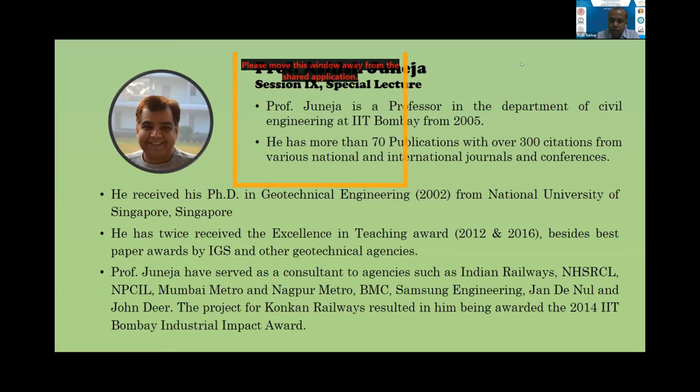Professor Juneja has served as a consultant to agencies such as Indian Railways, NHSRCL, NPCIL, Mumbai Metro and Nagpur Metro, BMC, Samsung Engineering, and Jan De Nul. The project for Konkan Railways resulted in him being awarded the 2014 IIT Bombay Industrial Impact Award. With this, I'd like to hand over the session to Professor Juneja for his special lecture on disturbance in soil structure due to post-cyclic recompression. Thank you, sir. Over to you, sir.

Thank you, Professor Sarkar. It is indeed an honor to be invited to this prestigious conference. To be honest, it seems the way it has been planned and the way the background images appear, as if we are in the conference venue. If you zoom in, you can actually see the first row seat of the conference hall.

With this, I'd like to spend the next 15 to 20 minutes to tell you what we have recently done in our laboratory, examining what really happens to soil after it is subjected to numerous cycles of loading. The genesis of this comes from the figure on the right-hand side, which shows a railway embankment.

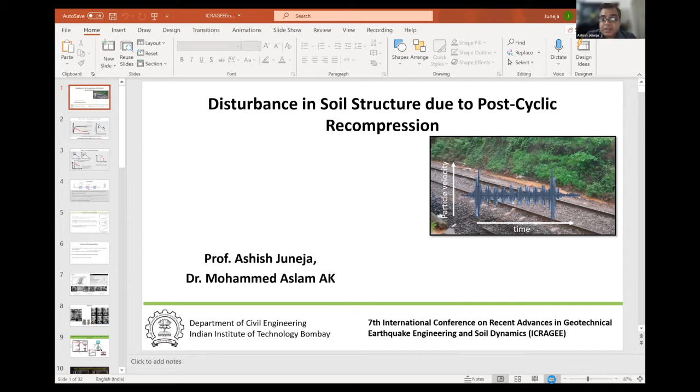So we are looking at what soils, the improvement, and at least to quantify those numbers. This is work by Dr. Mohammed Aslam during his PhD. He's now very well established, and I'm grateful. All these slides which are present are in fact from his PhD work.

So to give you a brief background, what really we mean by when the soils are subjected and what happens. If you look at an ordinary triaxial test, the figure on the left-hand side shows the same sample, the same soil with the same void ratio, but one is subjected to a higher confining stress, the other one is subjected to lower confining stress.

Lower confining stress, common sense tells us it'll show us a hump and a drop. A higher confining stress will be more like, irrespective of whether it's clay or sand, it'll show you like a normally consolidated soil. So to understand these two figures, look at the compression space on your right hand side. Both A and B have similar void ratio, but because they lie on either side of the ultimate line or the critical state line, you see that soil A will compress and soil B will dilate.

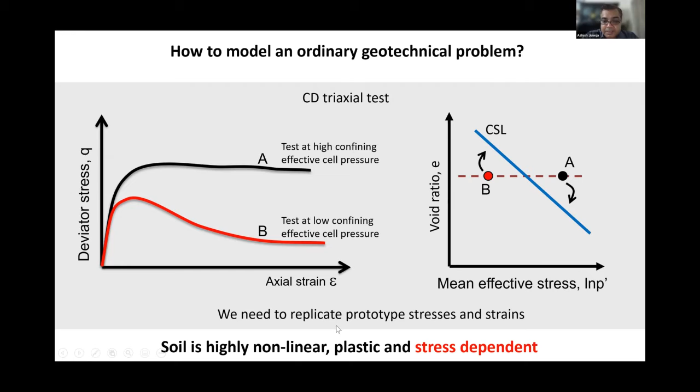It's important to understand that the soil from these curves is not only nonlinear, plastic, but is also stress dependent. This stress dependency is something which we'd like to examine in the next 10-15 minutes.

Now if you look at an ordinary Mohr-Coulomb or even those Cam Clay kind of models, what you see is this E log P curve, your standard E log P curve. What you see is if I'm on the URL, unloading-reloading line, can I just make this mouse thing as a...

Just trying to make this as a pointer. Okay, right click, yeah.

So if you look at the unloading reloading line, both Mohr-Coulomb or those Cam Clay family of models, they'll tell you no matter you go millions of times on this line, you'll just retrace this path every time. So the same thing happens when you do multiple loading, unloading. It's just a replicate of that figure.

The same, and if you look at the stress space, starting from A, going up to B, and if I unload B and then reload it, like any kind of dynamic load I apply, it just goes up and down with no change in any additional strains occurring, and no new development of shear volumetric strains being developed.

However, what you see is if I have multiple load cycles which are going at a certain period of time, the pore pressure development in the first cycle, and then in the second cycle and third cycle, it's not the same each time. You do see a different response which is more like a real life scenario.

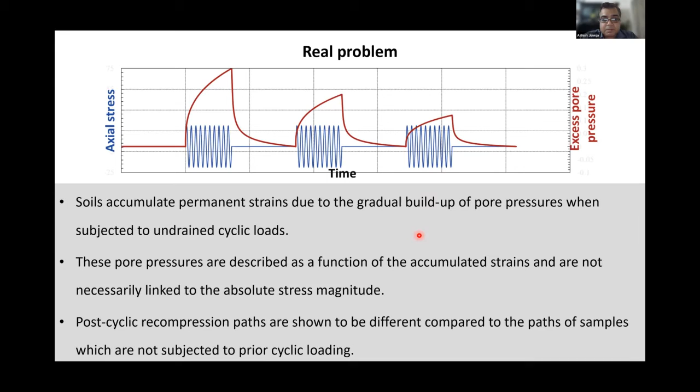So the bottom line is you do need something like a slightly more sophisticated soil model to understand this phenomenon which occurs.

And I'd like to just give a brief background on what happens to soil during loading. During loading, majority of you would be knowing you can either have a flow type failure, meaning loose sand or normally consolidated soil. They're quite nice up to a certain number of cycles, and then bang, it fails. Dense deposits will have more like cyclic mobility, wherein the deformation increases, and this first and second case are more serious.

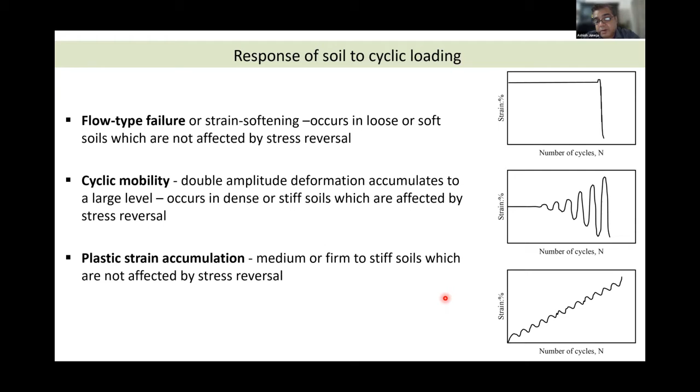The third one is where the soil is still trying to accumulate a lot of plastic strains, and it does not really reach its ultimate state. It just continues to take in more load. We'll concentrate more on the first and second type, because these are the soils which are really studied for liquefaction studies. We also look at the third one, because these are the ones which actually interest us for long-term stability of embankments, which is the case here.

In the next 15 minutes, I'm going to present the stress pore pressure changes in soil when subjected to cyclic loads, and a degradation model similar to structured soil models. It's a simple model—there are more complex ones, but because of limited available data, many recent models are hard to comprehend due to the number of input parameters. I'll also discuss what happens in post-drainage, whether intermittent or post, and briefly comment on observed changes in soil structure.

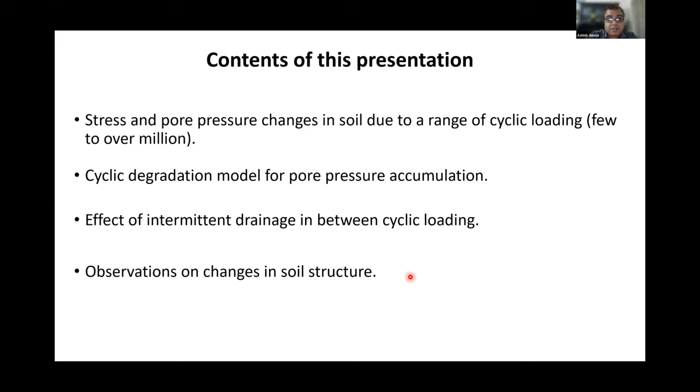Routine lab tests were done—this is pretty standard. One additional thing I'd like to highlight is the sample preparation method. Sands are normally prepared by pluviation, our preferred method, so I'd like to speak about that. For silty deposits, we used the under-compaction method, which is routinely followed. But let's look at the pluviator we have in our laboratory, which we tried to model using DEM.

That's a simple single soil particle. If you look at it, at 1 second it's somewhere here, then it falls down and rebounds. But look at the graph on the left—at 1 second, it's still there, not moving. At 1.5 seconds, marked by the vertical line, it starts to drop.

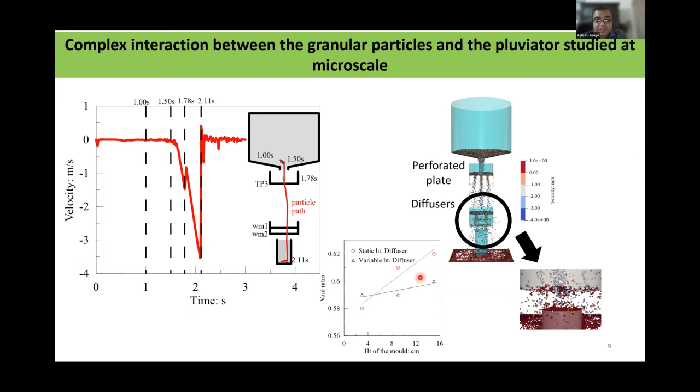This is what we normally advise: the diffuser should be able to move up as particles fill the container. Obviously you want a constant height of fall, but fixing the first perforated plate helps break up larger particles—not lumps, since this is granular material, but it prevents the soil from falling in a lumpy manner. The other method, which is more static, shows a difference in void ratio. These values help explain why the soil behaves in a certain way.

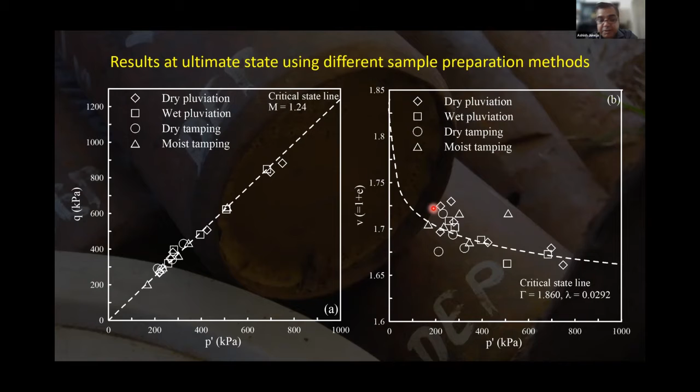But having said that, the ultimate state—meaning the friction angle at its ultimate state, shown in the first figure—and the figure on the right, showing other critical state parameters from compression space, meaning constant volume failure or failure at ultimate state, those conditions do not change regardless of the sample preparation method used. However, for dynamic loading, there is a substantial difference.

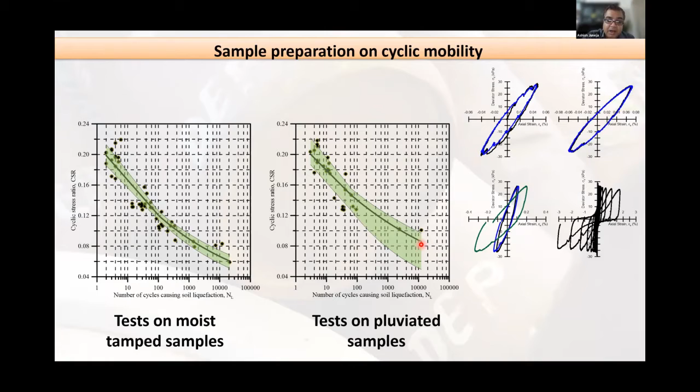If you compare the figures on the left and right, the moist sample, if you take a hand lens and look at them carefully, gives a lower number of cycles to reach liquefaction compared to the pluviated samples. Pluviated samples are notably higher. So we always say pluviated samples replicate more of a natural kind of deposit.

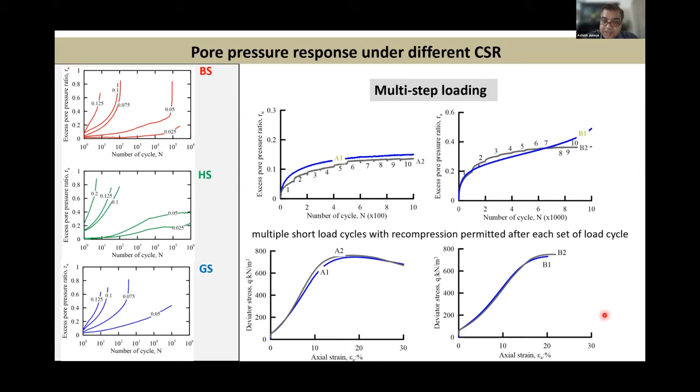But what we see is the triaxial test results, irrespective of whether we went stepwise or in one single go of maybe 10,000 cycles or more, suggest that the stress-strain response is quite similar. So this led us to the very basic degradation parameter, the development.

This is more than 30 years old, I think Ni et al. used it probably a couple of decades back. That's a degradation parameter similar to one used for structured clay. What we see is if I introduce this, can I develop or use this degradation parameter in terms of xi times N, so that's xi.

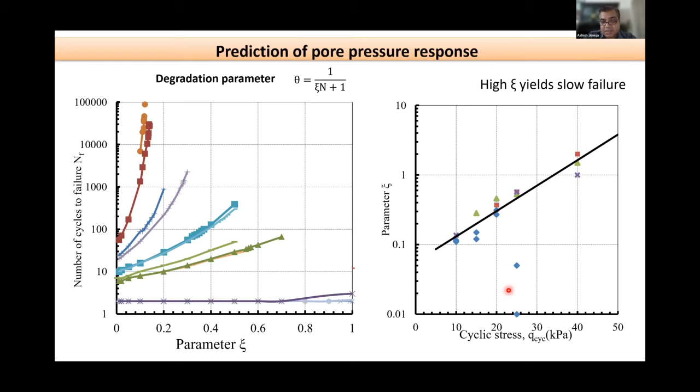So you can develop some relationship, and let's see with this relationship whether we're able to curve fit it, which is what engineers are happy with. What you see is with a very large number of cycles, maybe about 100,000 or so, you cannot get a fit, there is a large difference. Although with fewer cycles, up to 100, it gets a really good fit. Obviously, because you're trying to connect the two ends of the curve, not the whole curve.

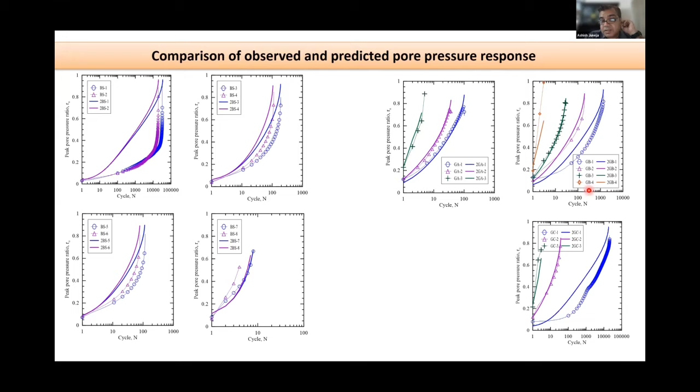But for the majority of tests where the number of cycles is large, it's difficult to connect, so even here this degradation parameter is not helpful. There are other models, like the power model, which require curve fit parameters A and B. The idea is you trace how the excess pore pressure ratio develops against N.

But again this has limitations because you're still not able to connect. There are also hyperbolic models with two unknowns, and with the development of more curve fitting platforms, as a student you can sit down and get endless fits, but none of them give any theoretical background to what really happens. So in the last couple of decades, a lot of papers have come out without theoretical background, though they come at much less computational cost and are simple.

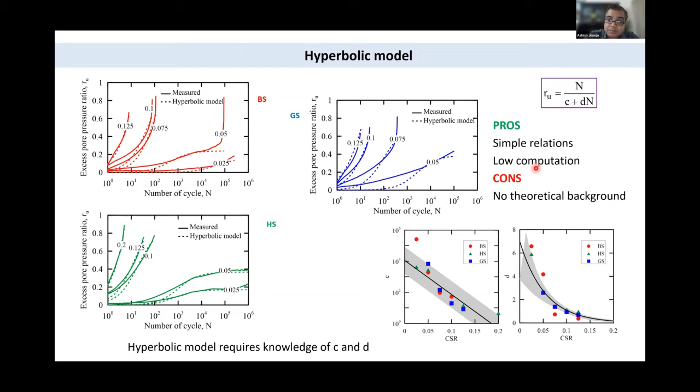What we would like to see is something where the soil performance can tell us more, not only the pore pressure response, but also whether the strains and stresses are able to tell us something more about the performance of the soil.

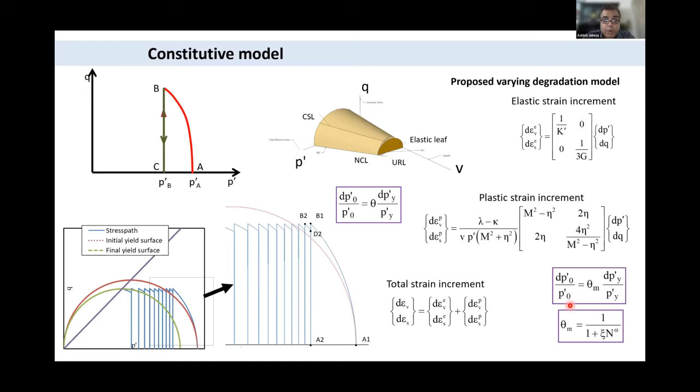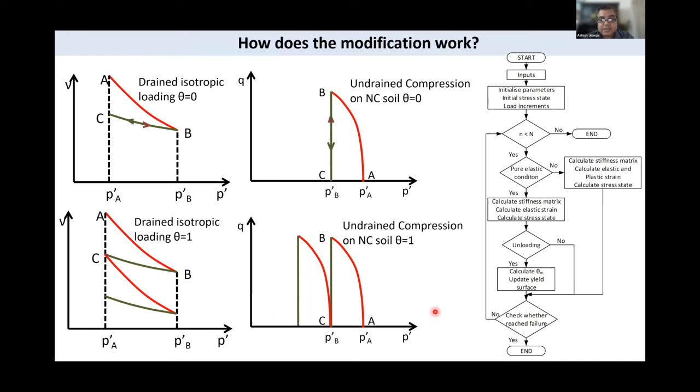Okay, thank you. So this degradation parameter, as we said, varies from 0 to 1. 0 would mean your typical Mohr Coulomb or Cam Clay, and 1 would mean your hardening parameter is made to change. So I'll just skip through some of the additional slides.

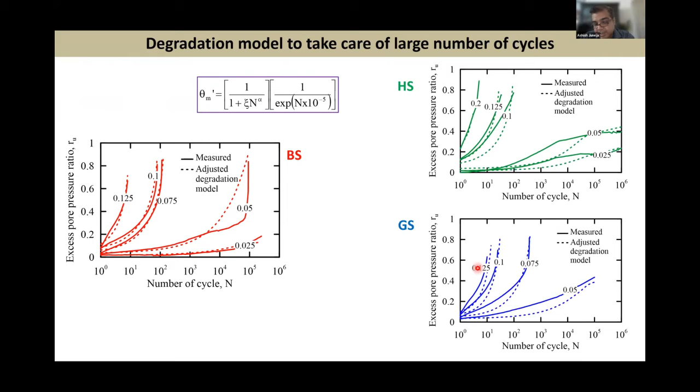Let me go to the next one, directly to the final one. So the final one is with the adjustment against the hardening parameter, we are able to model the response of the soil with only two additional unknowns. This is the beauty of this simple model.

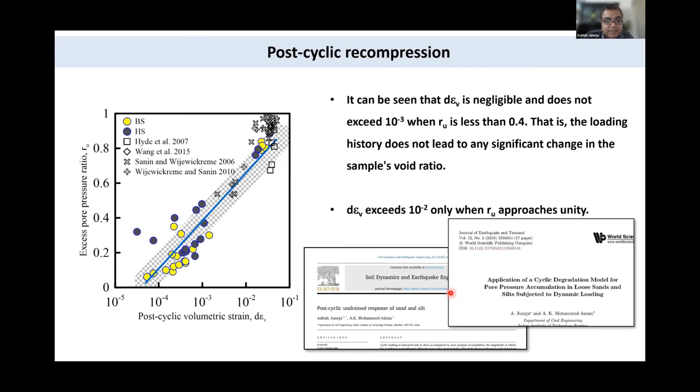This is probably the last thing I'd like to highlight: with samples having Ru less than 0.75—you can take it as a magic number—the unloading reloading line, shown by black arrows, doesn't make much of a difference. The property of the URL, or the kappa as we say, is the same. But with Ru more than 0.75, there is a change in the slope of the unloading reloading line, meaning the structure of the soil is changed when your pore pressure response is high.

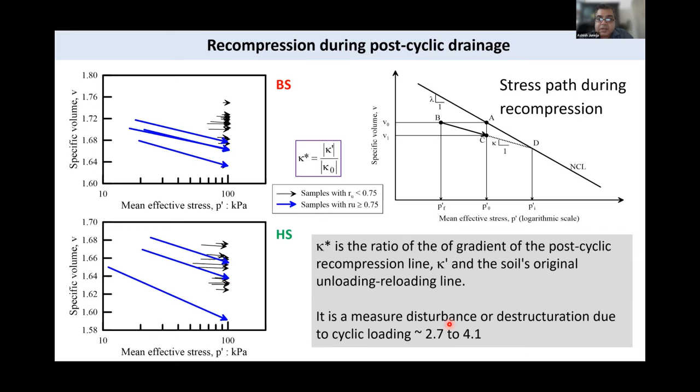In fact, these numbers can vary anything from 2 to 4, so your gradient of the unloading reloading line is large.

So again with this background, can we now predict what is the increase in strength? Q star is your new strength divided by old strength, that's undrained deviatoric strength increase divided by the old one, and that's your OCR by definition. If you look at the paper, the definition of OCR is defined there, how we have taken it. But with Ru less than 0.75, you still see that the performance of the silty or angular sample is better compared to the rounded granular deposits.

If I have RU more than 0.75, that is when the pore pressure response is higher. What we see is the increase in strength seems to be independent of your CSR.

That's again an interesting thing, but it has a relationship between OCR over here and the power, which we have as OCR to the power of some capital lambda.

This capital lambda, our work has shown, can be obtained even from your standard triaxial test. Meaning, if I need to find the increase in strength of the soil due to dynamic loading, I really do not need any cyclic triaxial test. I do my routine drained and undrained triaxial testing, get my capital lambda from there, and I can predict what is my increase in strength.

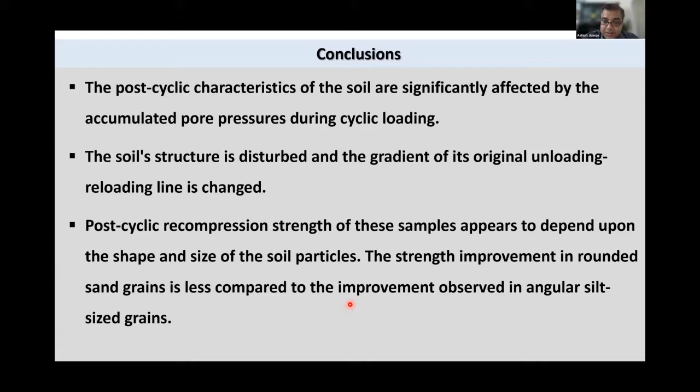With this, I'll conclude the presentation. The post-cyclic characteristics of the soil are dependent on the pore pressure accumulation function, which is based on numerous work. You can work over it. And of course, we have given some hint on the particle size and shape, which makes some effect on the performance and response.

Okay, with this, I'm sorry I took an additional 5 minutes. I'm really grateful to the chairman and vice chairman for allowing me to speak.

Thank you, Dr. Juneja, it was a very interesting presentation. That is what prompted me to give you as much time to speak. I wish we had the opportunity of listening to you some more, but I think there will be in the future. Thank you very much for your very vivid presentation.

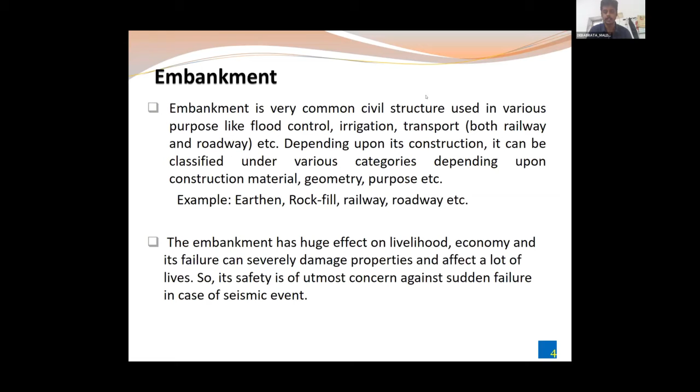Introduction. Embankment is a very common civil structure used for different purposes like flood control, transport, irrigation, and depending upon its construction material or its purpose, it can be categorized under earthen embankment, rock fill embankment, railway or roadway embankment. It has huge effect on livelihood, and its sudden failure in case of a seismic event can cause a lot of damage to the property as well as human lives.

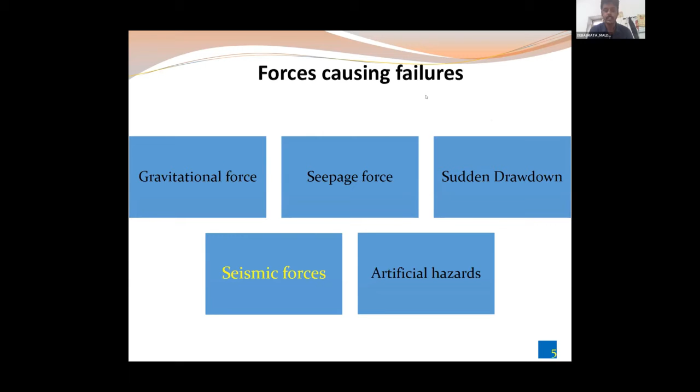Low height embankment normally in our country is constructed for rural or suburban transportation purpose, and it is normally checked against static stability, but very few times, due to low budget or other constraints, it has been checked against dynamic loading. But in recent times it has been shown that due to low to moderate level earthquake, this can be a cause of failure of those embankments.

So a thorough analysis of this type of embankment with foundation soil in static and dynamic condition, in association with monitoring of different parameters like pore pressure, vertical deformation, and lateral deformation, is very necessary.

And for dynamic loading, a representative low to moderate earthquake has been taken, but as it has quite high PGA...

Yeah, tell me, you continue. Arya, can you please mute the other participant, please?

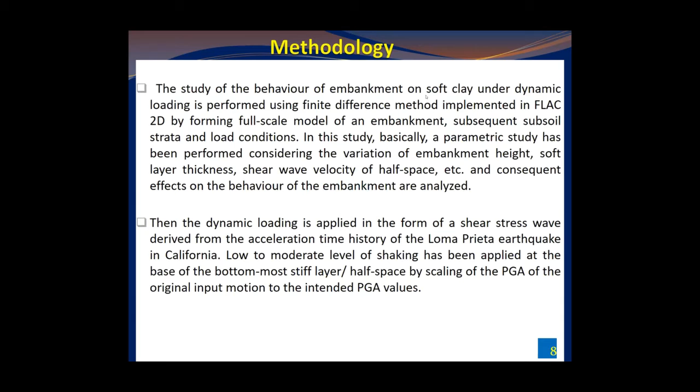The low to moderate earthquake had quite high PGA, so it has been scaled down with respect to PGA to simulate some input motion to intended PGA values. Now this is the geometry of the embankment.

The face width has been 10 meters with a quite stable static slope, 1 vertical is to 2 horizontal, and soft layer thickness has been varied between 5 meters and 10 meters, and below the soft layer there is a stiff clay layer. Its shear velocity and shear modulus has been changed, and all combinations lead to 12 different models.

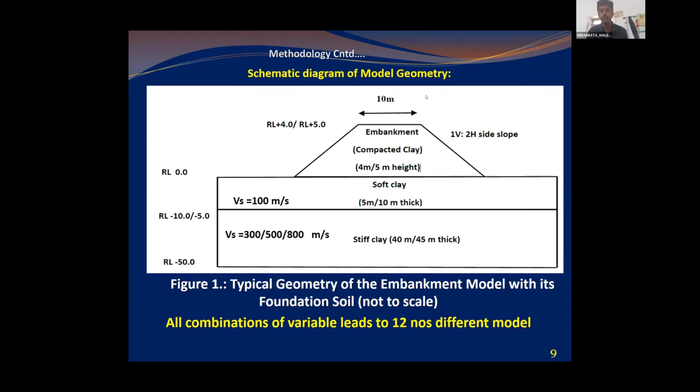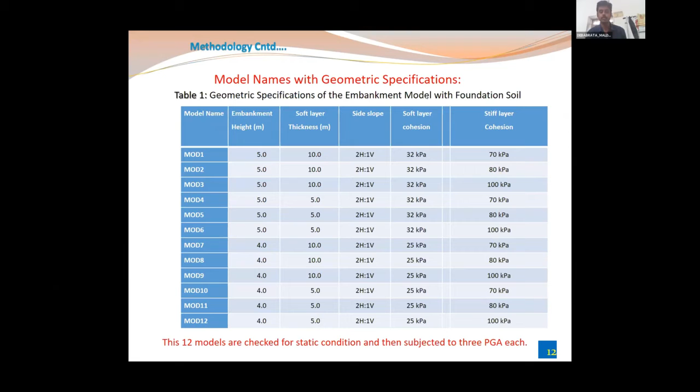In Table 1, the geometric properties of the 12 models have been shown, and in Table 2, the engineering properties of the soil material have been tabulated.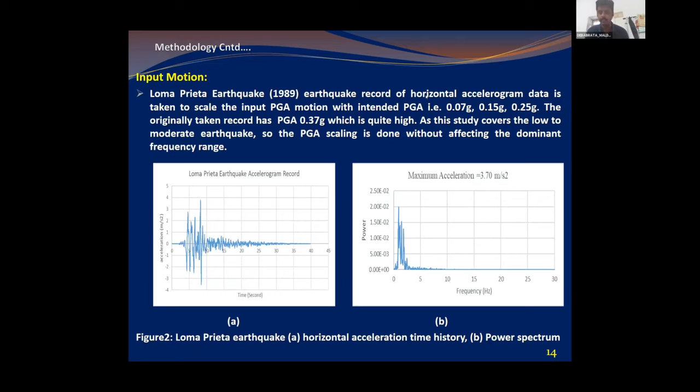Now this is the representative low to moderate earthquake that has been taken as reference, and these are the power spectrums showing the significant frequencies mostly within 20 Hz. And these are the original acceleration time histories derived from the original earthquake with PGA 0.07, 0.15, and 0.25 G that has been used in the dynamic analysis of the model.

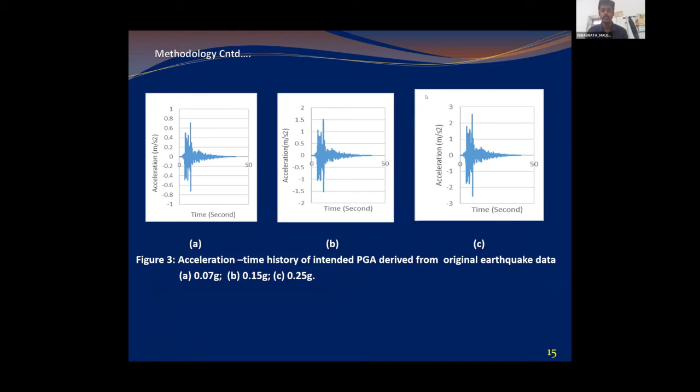The shear stress time history has been applied at the base of the model for analysis, and the boundary has been taken as a non-reflecting boundary. This means the wave reflected back to the model won't affect the result, as the wave would not be reflected back into the model.

For mesh generation, the mesh size has been kept in association with the study of Kuhlemeyer and Lysmer, at 1/10th of the shortest wavelength associated with the significant maximum frequency range. In our case it turned out that the maximum rectangular element is of size 0.5 meter by 0.5 meter.

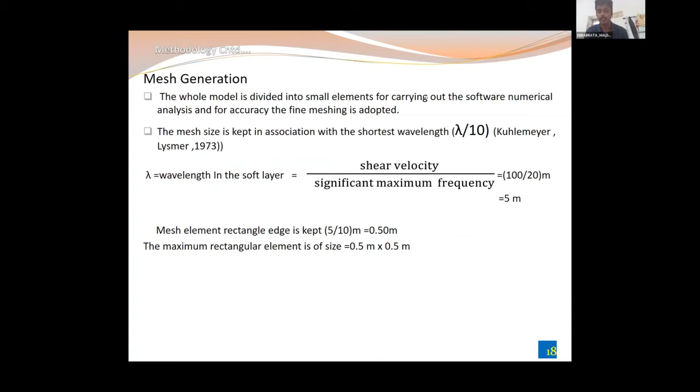Result and discussion. Results and discussion has been categorized; before proceeding to the dynamic analysis, static stability has been checked.

Now in table 4, the instantaneous settlement has been tabulated, as we are not considering consolidation here. The vertical settlement is not very much in different cases for 5 meter embankment, and is mainly affected by the soft layer thickness. For 5 meter embankment height with 10 meter soft layer thickness, the vertical settlement ranges from 20 to 23, while for 5 meter soft layer thickness it is much less, 4.5 to 7 millimeter.

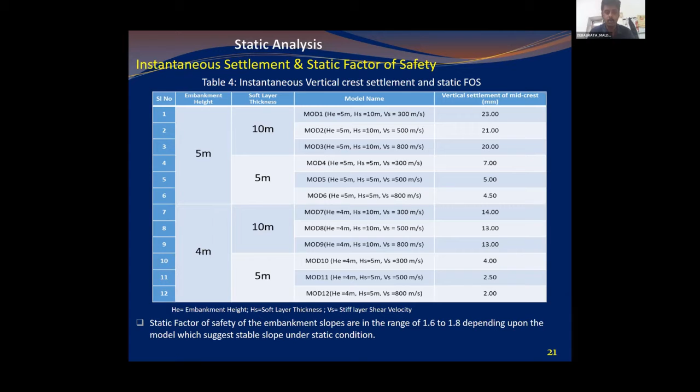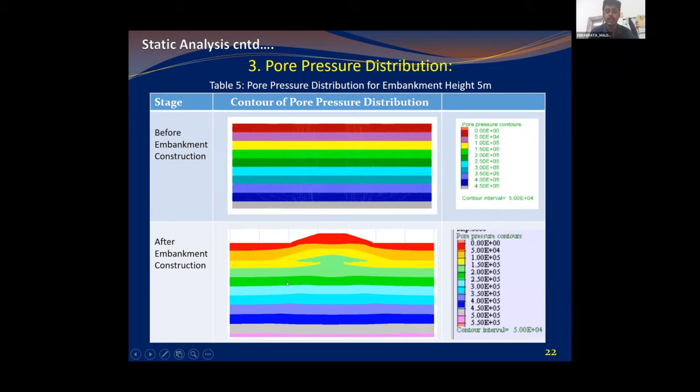The static factor of safety ranges from 1.6 to 1.8 depending upon the model, suggesting a quite static stable slope. This is under static condition, the pore pressure distribution before and after embankment construction. You can see that after embankment construction there is a rise in pore pressure, and as the clay material has low permeability, it is not able to dissipate.

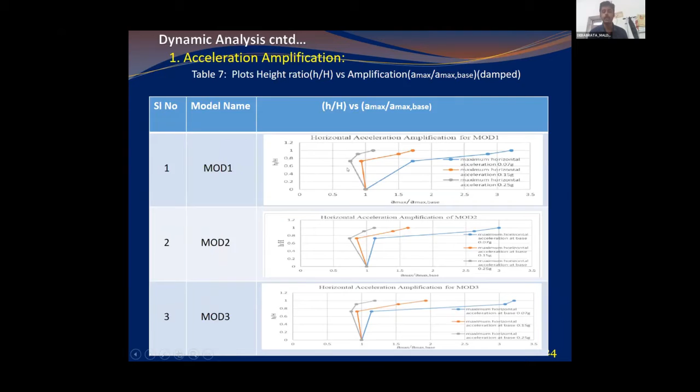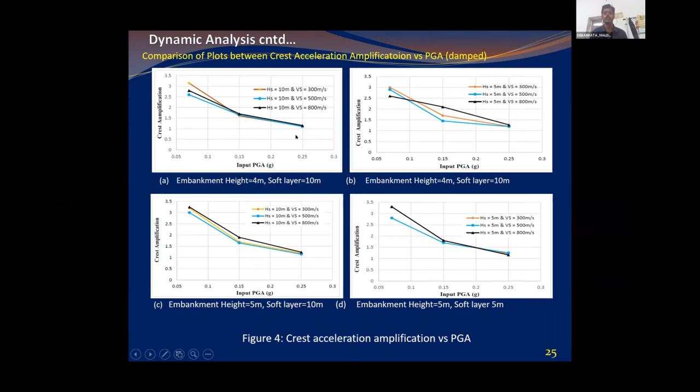This is the acceleration amplification variation with the height measured from the base level of the 3 models. The blue line suggests the lower PGA level, and the gray line suggests the higher PGA level. The amplification versus input PGA curve for different models has been plotted, and a similar pattern is shown for all cases: with increased PGA, the acceleration amplification tends to decrease. This amplification majorly happens in the soft layer, and decreases with increment of input PGA.

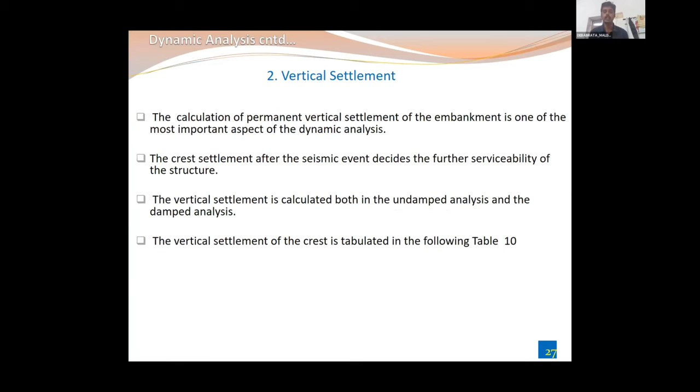The vertical settlement is another important parameter as it relates to serviceability, and it has been derived for the undamped and damped cases for all the models, shown in this table. As a summary, we can see from the table that the vertical settlement is more in damped cases than in undamped cases, due to shear modulus degradation. It has been plotted as mid-phase settlement versus PGA graphs for both types of embankment.

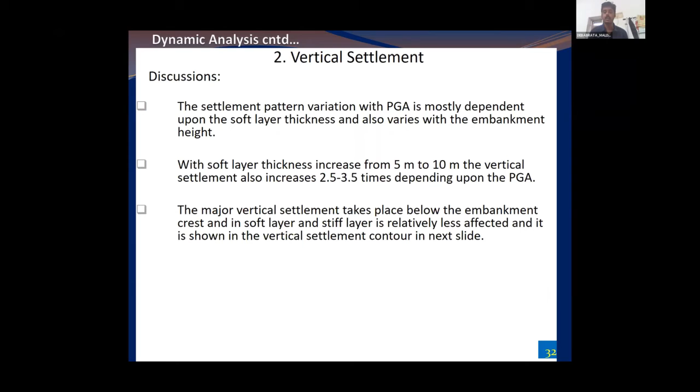The discussion is that the settlement pattern variation with PGA is most dependent upon the soft layer thickness, and also varies with embankment height. PGA is the major affecting factor of the settlement. With soft layer thickness increasing from 5 to 10 meter, the settlement increases 2.5 to 3.5 times. The major vertical settlements are restricted to the soft layer and embankment layer, as can be seen from this contour diagram.

So regarding vertical settlement and horizontal displacement from this contour diagram, we can see that as opposed to the vertical settlement, the horizontal displacement mainly happens in the soft layer below the toe level.

Like, your time is up. Yes, sir. Plus this 2 minutes, sir.

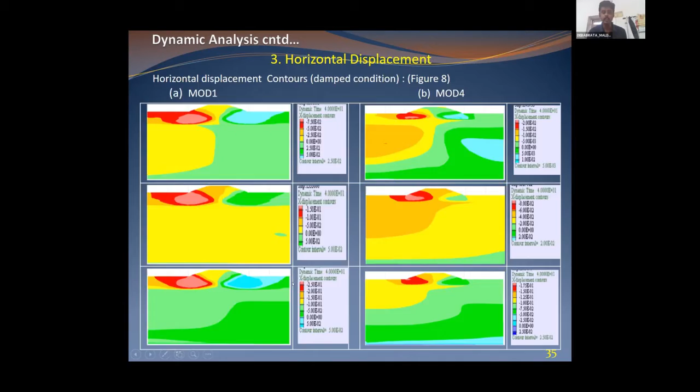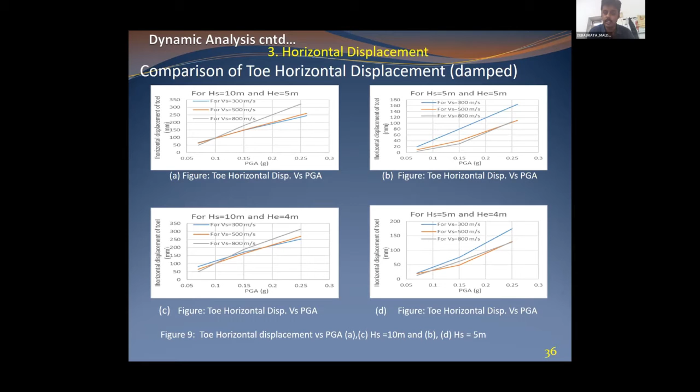Okay, in the toe region, as we have seen for vertical settlement, it is maximum at the crest level and below crest level. So this is the difference between the vertical settlement pattern and horizontal settlement pattern, and this pattern is prevalent for all models, shown here for model 1 with 3 PGAs and model 4 with 3 PGAs. The horizontal displacement of the toe of the embankment model against different PGA levels and different models has been shown in the curves.

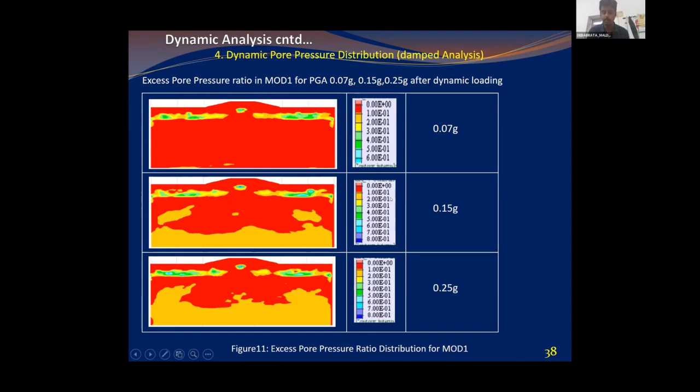Excess pore pressure generation for model 1 against 0.25 G is shown, though excess pore pressure generation itself is less important. The more important parameter is the excess pore pressure ratio. For model 1, we have seen this at 0.07 G, 0.15 G, and 0.25 G. The pore pressure ratio is maximum in the soft layer, shown by the green patches here, but it is well below 1, which is the value that would cause instability.

Conclusions: all chosen models exhibit a factor of safety greater than 1.50, suggesting a quite static stable slope.

The crest amplification with respect to the base decreases with the increase of PGA, and major portion of amplification takes place in the soft layer.

Modulus degradation in damp cases. Vertical settlement mainly is only dependent upon the PGA of input motion and soft layer thickness below it.

The horizontal displacement is maximum near the soft layer, below the toe level, and sustained excess pore pressure ratio maximum is in the soft layer, but it's not enough to cause any instability from an excess pore pressure point of view.

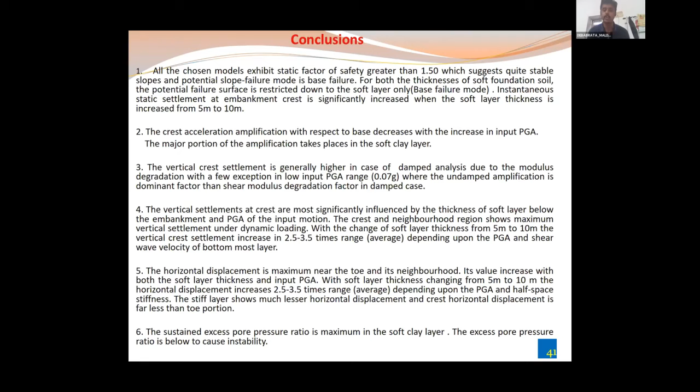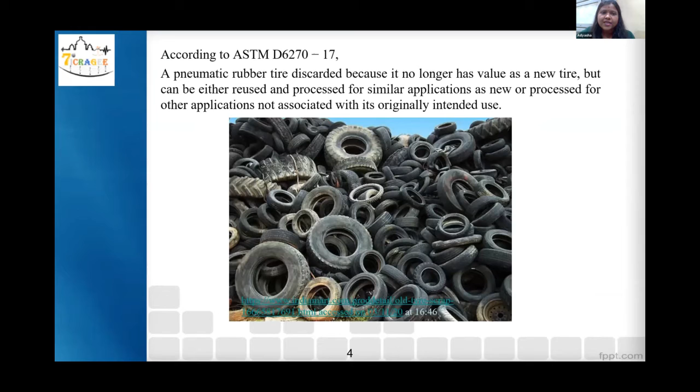Coming to civil engineering applications, according to ASTM D6270, these materials' derivatives are divided under three heads - tire crumbs, tire chips, and tire shreds. The division is made based on their sizes. Tire derivatives greater than 5 centimeters are called tire shreds. Tire chips are derivatives between 1 to 5 centimeters, and the smallest ones, lesser than 1 centimeter, we call tire crumbs.

If you have observed a tire properly, you might have seen there are reinforcements in it to provide strength. So what about the reinforcement? Tire shreds being the largest in size, we do not expect any reinforcement to be removed after cutting them into smaller pieces. But in tire chips, we do expect the removal of metal or wire reinforcement that is present. In case of tire crumbs, being the smallest, we do not expect any kind of reinforcement present in them, be it metal or fiber reinforcement.

Now coming to their uses in the civil engineering field - in geotechnical engineering, the first use was reported in the 1990s, mainly in the US and Canada. The pioneering research was reported by Humphrey in 1998. Later it spread to the Asia Pacific region and Europe, and in Japan they started practically using these materials around the 2000s.

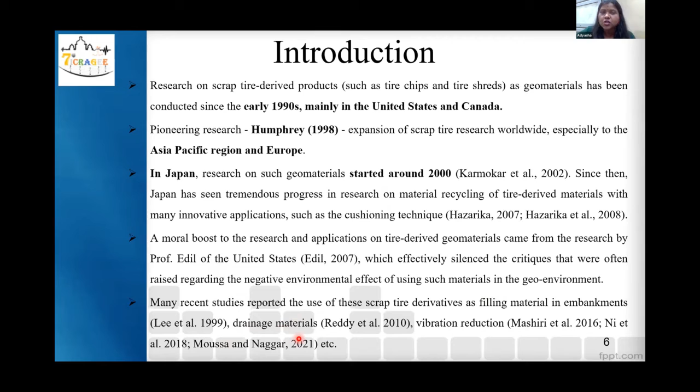So all those critics were silenced by Professor Edil of US in 2007, and after that, these materials showed tremendous use in civil engineering field. These materials are being used as a filling material in embankment. As I said, they are very lightweight. They have good drainage permeability, so they are used as drainage material at many places.

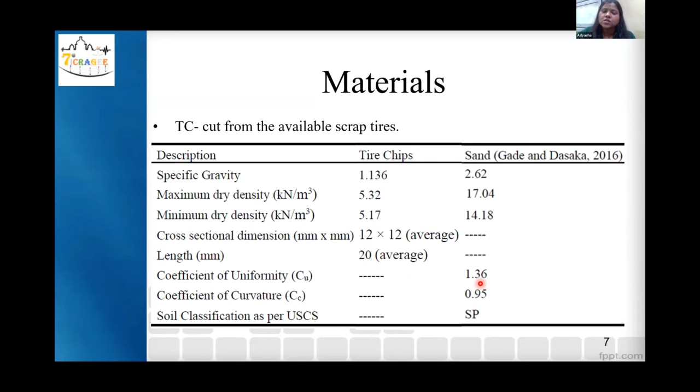Now coming to the material used in the present study, we have used tire chips. These are the basic properties of tire chips and sand that we have used. The sand used in the present study is Indian Standard Sand Grade 2, and the tire chip used in the present study is cut from a locally available scrap tire.

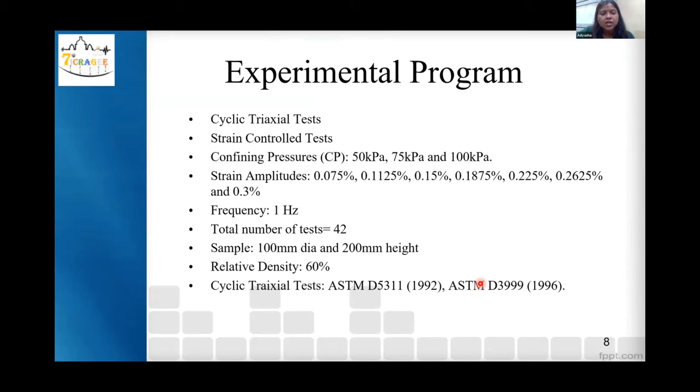The experimental program for the present study: we have conducted strain controlled undrained cyclic triaxial tests for 3 different confining pressures, 7 different strain amplitudes, at a frequency of 1 Hz, and a total of 42 experiments were carried out at a relative density of 60%.

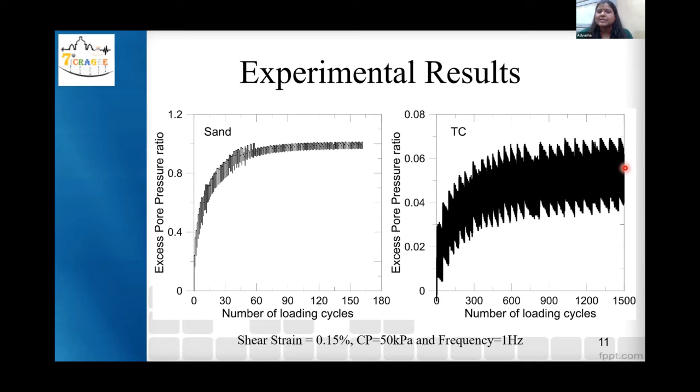Now coming to the effect of strain amplitude. We can see the damping ratio increases with strain amplitude, and the shear modulus decreases with strain amplitude, and similar behavior is seen for both sand and tire chips.

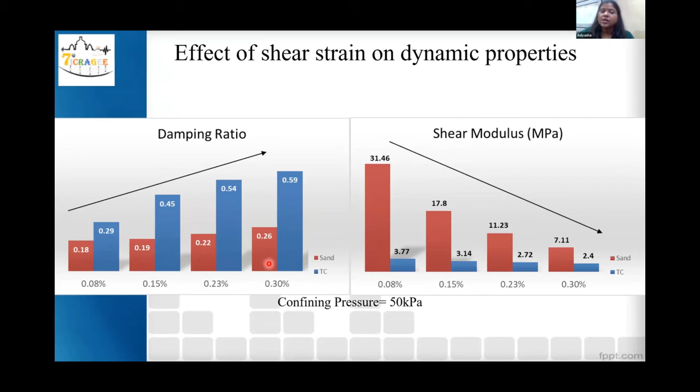Then coming to the effect of loading cycles on shear modulus — here the x-axis shows number of loading cycles and the y-axis shows shear modulus. For sand, the shear modulus degrades very fast; for the initial 20 cycles, the shear modulus degraded significantly for sand.

But the shear modulus value of tire chips, while maintaining a lower value, stays constant with increasing number of loading cycles. There is no degradation as seen in the case of sand.

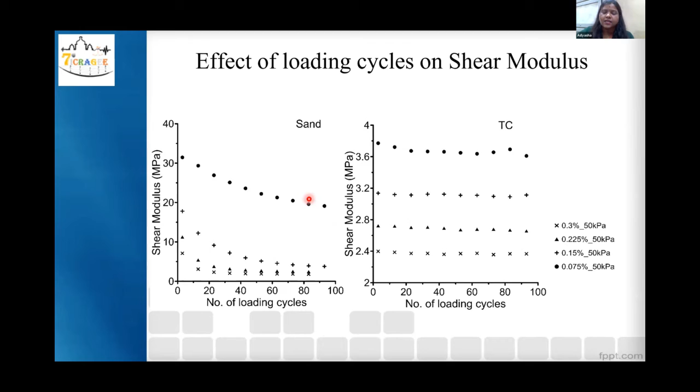Okay, sir, just 1 minute.

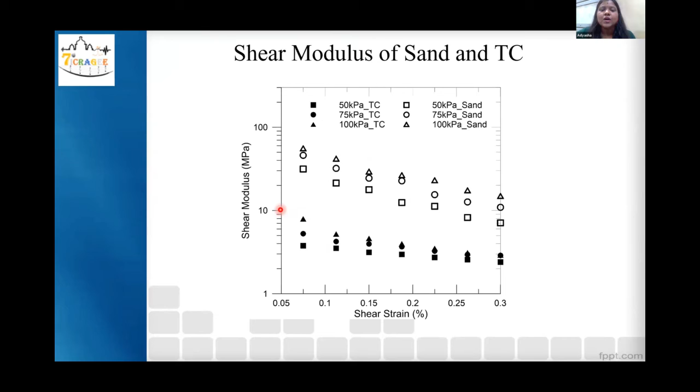So similar behavior is seen in damping ratio as well. Coming to the shear modulus value, tire chips have a very lower shear modulus value in comparison to sand, but a very high damping ratio value in comparison to sand. And these are the number of loading cycles. The maximum number of loading cycles for the lowest strain amplitude chosen was around 800 for sand, but the excess pore pressure ratio value didn't even reach 0.1 after 1500 loading cycles for tire chips.

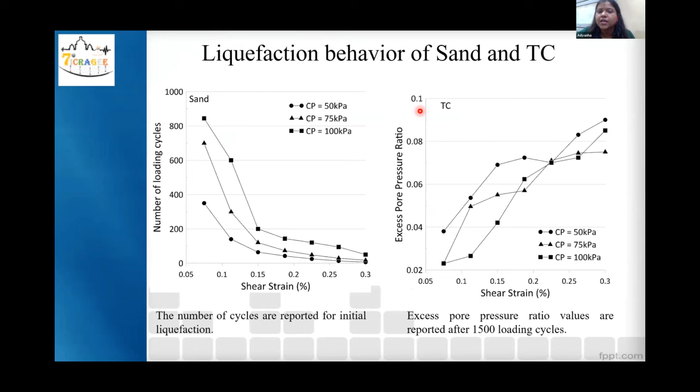Thank you very much, Adhyasha. That was a very interesting presentation. Dr. Rajiv Sarkar, do you have any questions, please?

If anybody is having any queries, they can ask Adhyasha. Or if I have a small query, Adhyasha - yes sir, what's the size of the tire chips you have used?

So the tire chip size was 12 mm by 12 mm, and the thickness of the tire chip was varying, subject to the fact that the tires we get from the market are subjected to wear and tear. So we have a varied thickness in that way.

And have you - yes, I have one small question. Yes sir. What are the field applications? Where do you feel it can be used, on roads for?

So these materials have a vast application in the field. Of course, directly using just the tire chips in the field will be problematic because they undergo high compression and have low strength. But if I can potentially mix them with sand, it can gain strength from the sand, and also possess the damping behavior from the tire chip. This composite material can do magic in the field. It can be used for vibration reduction, be it in pavements or railway embankments. It can be used as lightweight and cheap backfill in retaining walls, and as drainage layers in landfills. The application is not much widespread here in our country, but it is being used in countries like Japan, practically in the field. So yes, they are very useful for the field.

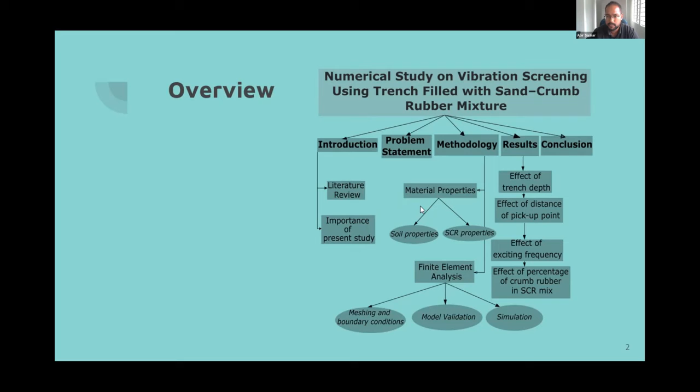Okay, so I'll be presenting on a numerical investigation wherein we are using a sand crumb rubber mixture for mitigation of ground-borne vibrations. Let's go through a brief overview of the presentation. The presentation has been arranged in 5 parts: initially the introduction, then the problem statement, then the methodology where we will discuss the material properties and the finite element analysis carried out in Plaxis, followed by the results, and finally a few conclusions on the study.

So about the ground-borne vibrations. One of the major problems in soil dynamics, and what we are facing nowadays, is how to mitigate the vibrations generated either from machine foundations, train loading, or from transport vehicles. These affect the nearby structures, so this is a very hot topic right now - how to contain or isolate such types of vibrations.

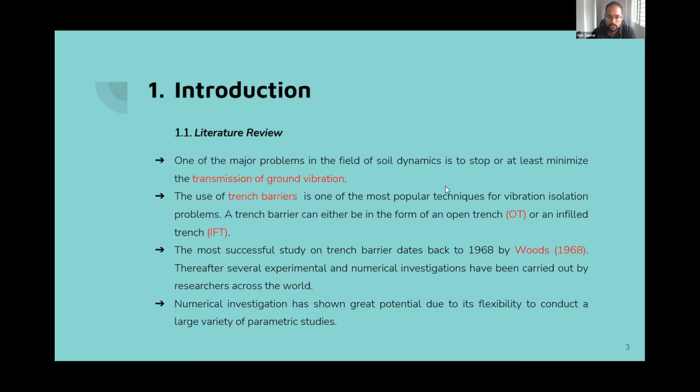So from initially, one of the most popular techniques is through trench barriers, and among them is the open trench and the infill trench. These two types of trench barriers have been studied by researchers over the years, and one of the most successful initial studies was reported in 1968 by Woods. Thereafter, several experimental and numerical investigations have been carried out. Numerical investigations have shown great potential because a lot of parametric studies can be conducted.

One of the most established facts is that the acoustic impedance ratio of a material controls how fast the waves can travel through that material. So if a trench material has a low acoustic impedance ratio, it will be able to screen the vibrations effectively. One factor in evaluating the efficiency of vibration screening is calculating the ARF, that is the amplitude reduction factor.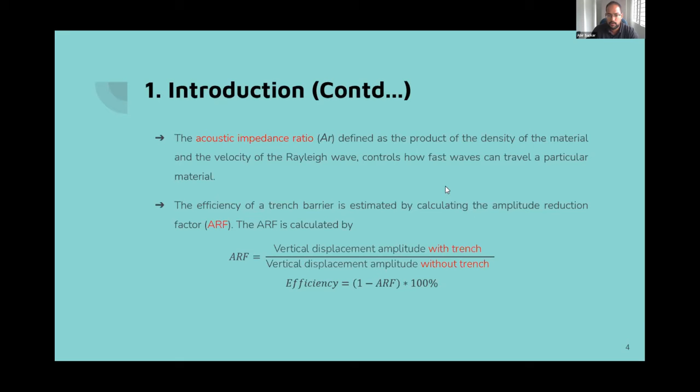The amplitude reduction factor is calculated by taking the ratio of the vertical displacement amplitudes when there is a trench and when there is no trench. Finally, the efficiency can be calculated as 1 minus ARF times 100%, which gives the efficiency in terms of percentage.

A few of the studies we consulted earlier show the number of types of infill materials that have been studied. Concrete filled trench material has been studied. Geofoam filled trench material has been studied widely. Then also intermittent geofoam, where there are alternating layers of geofoam and air pockets, has been studied. But there are few studies which have reported on sand and rubber mixture.

So in our present study, our main focus is on utilizing this sand and rubber mixture. One reason is, as already discussed, the importance of crumb rubber. One big issue for the open trench condition is that there can be wall instability, and it can get filled with rainwater, which reduces its efficiency - this was suggested by Alzawi in 2015 - so therefore an infill trench condition is a safer solution.

Crumb rubber is basically a waste product, as discussed previously, so it is very cheaply available, and also it is non-biodegradable, so it's difficult to dispose. So utilization of crumb rubber would be an environmentally friendly, eco-friendly approach. That is the main motivation of the present study - to use crumb rubber - and also the objective of the present study is to evaluate the screening efficiency of the sand rubber mixture as an infill material.

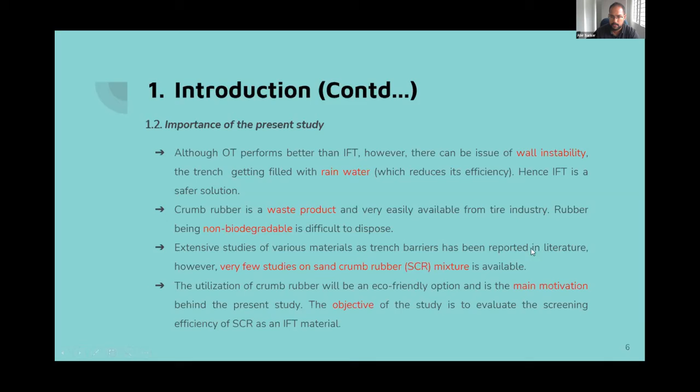Let's start with the problem statement. This is the schematic diagram of the numerical model, and from the sectional view we can see that we have given a sinusoidal input loading here, followed by a trench, and apart from that, we measure the pickups - the vertical displacements - at certain intervals.

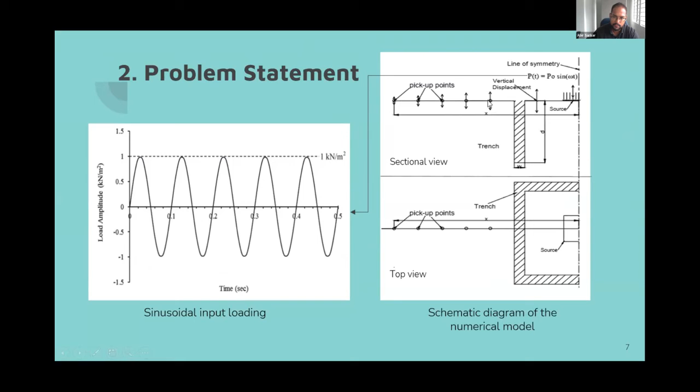This is the sectional view, and this is the top view.

Coming to the material properties, we need a soil box for the modeling. We have taken the local soil properties at NIT Silchar campus for modeling the soil box. For the dynamic properties of the soil, we have referred to Alpan 1970.

Followed by the sand crumb rubber mixture. For modeling this, we have taken locally available Barak River sand and locally available crumb rubber from local industries, and performed numerous resonant column tests to determine the shear wave velocity, and from that, the dynamic shear modulus G, where G equals rho Vs squared. So from the RC test we get Vs, and from the relation G equals rho Vs squared, we get the G values.

The SCR mixture was prepared in 10, 20, 30, 40, 50, and 70% crumb rubber mixtures, and also at 35 and 65% relative densities.

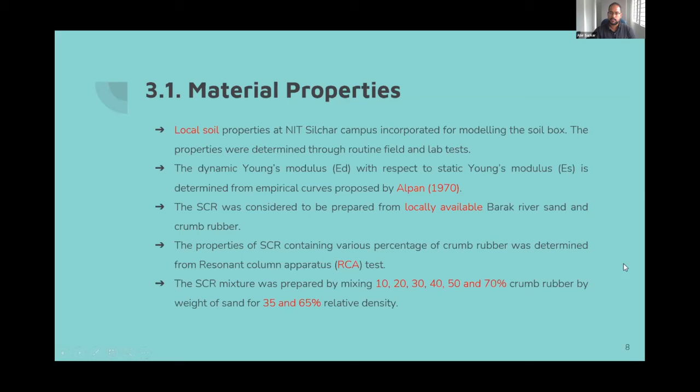The material and soil properties are shown here. Some tests, the shear wave velocity and primary wave velocity, were determined from MASW tests and seismic refraction tests. These are the SCR properties.

We had earlier talked about the acoustic impedance ratio, and saw that it is lower for the 35% relative density. That's why we did not do tests considering 65% RD, because the acoustic impedance ratio of 35% RD is lesser, so it should give a better result. These are the dynamic properties of the SCR mixture at 35% RD; we did not consider the 65% RD.

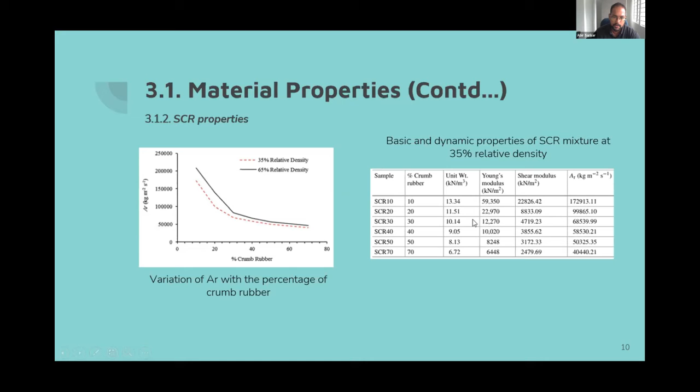Next, the finite element analysis. The study was carried out with a quarter of the total geometry, and the exciting frequency of the loading was kept at 10 Hz. We also changed the loading frequency further to see the effect of the exciting frequency.

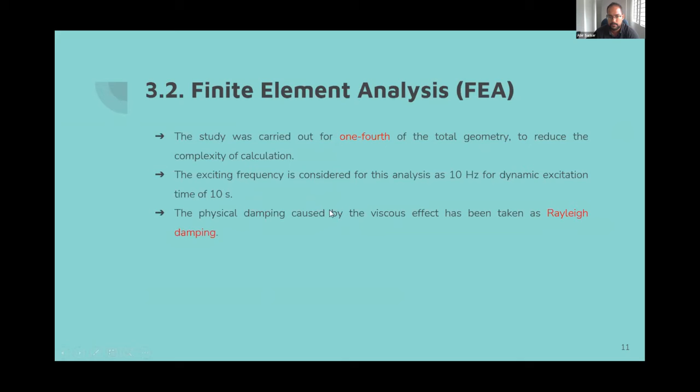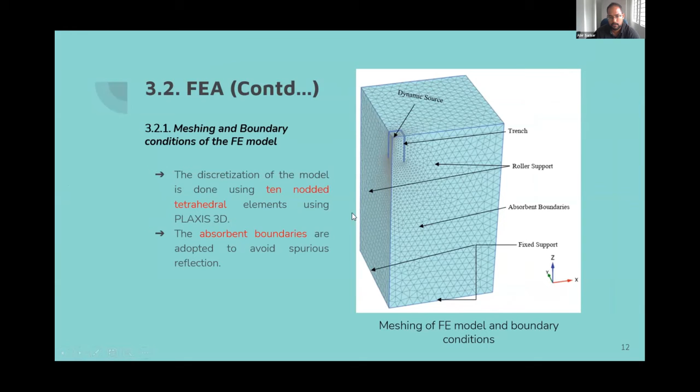The physical damping was assumed to be Rayleigh damping, and the Rayleigh damping parameters alpha and beta were determined for the different materials. This is the meshing and modeling of the FEA, done in Plaxis 3D, with absorbent boundaries used.

For validation, we compared the results of the present study with previous studies, and found that we have fairly consistent results.

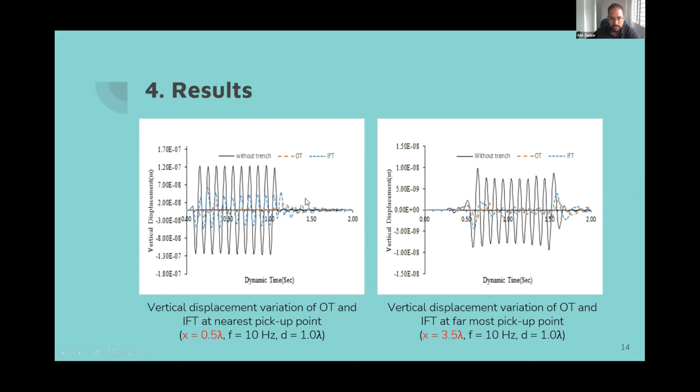Coming to the result section, this is the vertical displacement variation of the OT and IFT conditions at the nearest and farthest points. The black line represents the without-trench condition. The minimum is found for the open trench condition, since open trench has the highest efficiency, followed by the infill trench condition. This is the same at the farthest point as well.

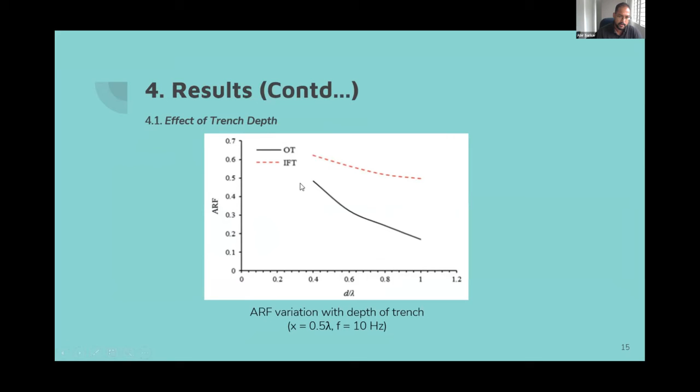Talking about the effect of trench depth, this is probably the most important criteria for trench design. As we can see, with increase in trench depth, the ARF is decreasing, meaning the efficiency of the trench is increasing.

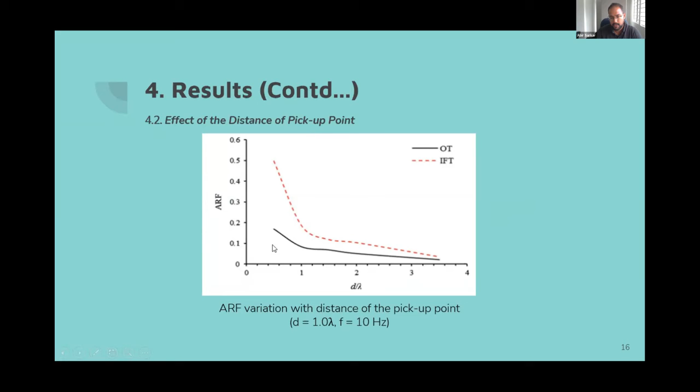On the effect of distance from the pickup point: as we move further away from the source of vibration, we can see a decrease in the ARF, suggesting an increase in efficiency.

Finally, the effect of the percentage of crumb rubber in the SCR mixture: as we increase the crumb rubber percentage, the ARF decreases, meaning the efficiency of the trench increases. However, increasing crumb rubber means a better damping effect, but also suggests a reduction in the strength of the soil.

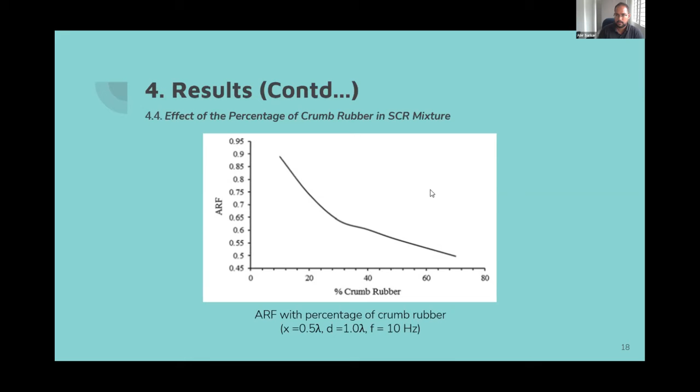So a balance must be maintained.

Coming to the conclusions: in case of the open trench, we found 80 to 90% efficiency was observed at the nearest pickup point for a normalized depth of 1 and width of 0.05, with the trench located at a distance of 0.4. For the case of IFT, about 50 to 60% efficiency was observed under the same conditions.

And this was for the loading case of 10 Hz frequency. The present analysis also shows that the ARF decreases with an increase in the frequency. So we will suggest using the sand crumb rubber mixture for higher loading frequency, not for lower frequencies.

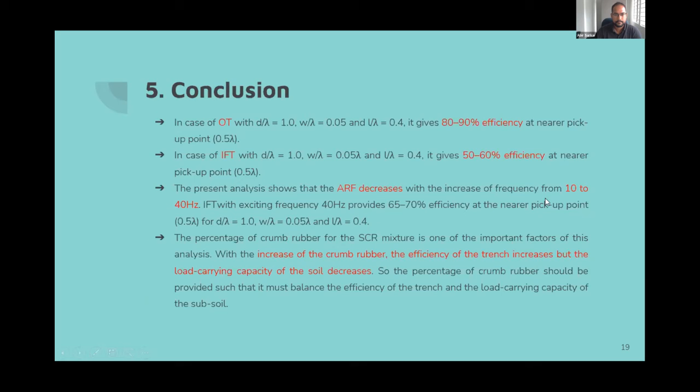Lastly, as we suggested, increasing the crumb rubber increases the efficiency of the trench. However, the load carrying capacity of the soil also decreases because as we keep increasing the crumb rubber percentage in a sand crumb rubber mixture, the shear modulus decreases and the damping ratio increases. A decrease in shear modulus implies that the stiffness of the material is decreasing, and therefore the load carrying capacity of the mixture is also decreasing. So while designing, a particular balance should be maintained so that the load carrying capacity of the soil is also maintained. That's it. These are some of the references we've used.

Thank you very much, that was an interesting presentation. Dr. Abir, would you like to- sorry, Dr. Rajiv Sarkar, yes, you can take over. Dr. Abir, it's a nice presentation. If the audience have some queries, they can ask Dr. Abir, or else I have a few queries. Can I ask Dr. Abir? Yes sir, please sir, please.

Actually, how was the loading pattern in your finite element model? The loading pattern was sinusoidal. A harmonic loading was considered.

Is it from the top or from the bottom? No, it's from the top. Once I'll show you. Over here is a dynamic source. At this point we have designed it for 1/4 of the model. So at this point there was a dynamic source.

Actually, that's my doubt. Why 1/4 of the model? 1/4 of the model, sir, so that the computational load is less on the system. Otherwise, since this is a 3D model, you may have asymmetry in the other axis. Generally, if you are having plasticity or nonlinearity, then we used to go for the half model.